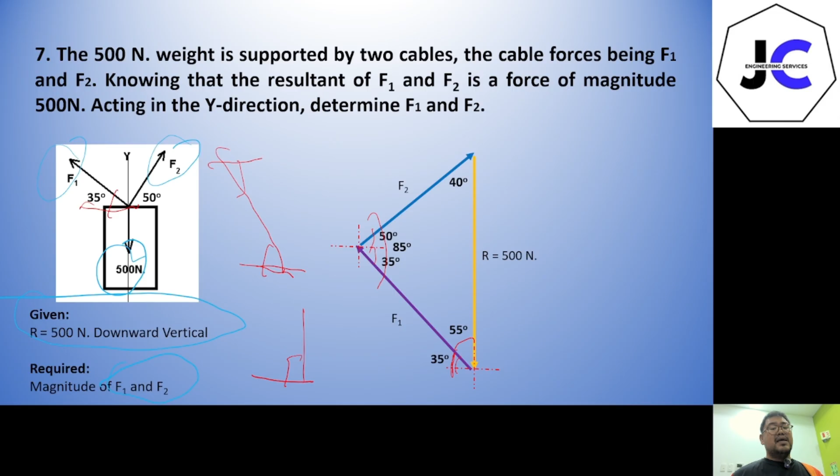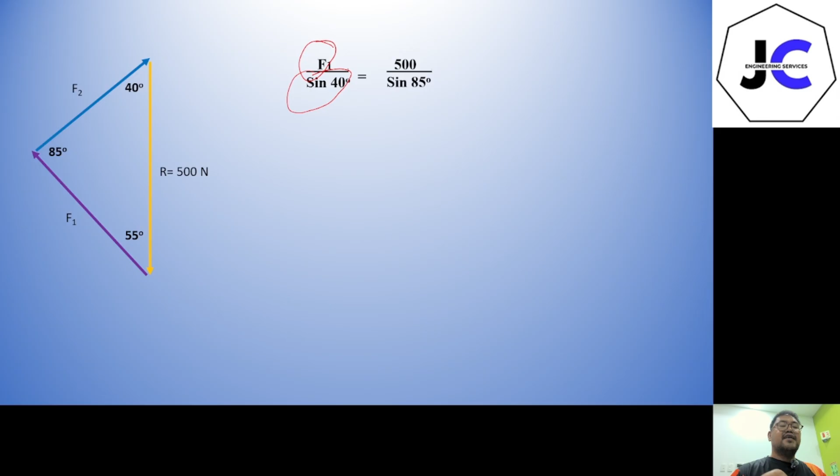Now, solving for F1 and F2, the most appropriate method is the sine law. For F1, we have F1 over sine 40. F1 opposite sine 40 is equal to 500 opposite 85. Now, cross multiplying and solving for F1, we have 322.62.

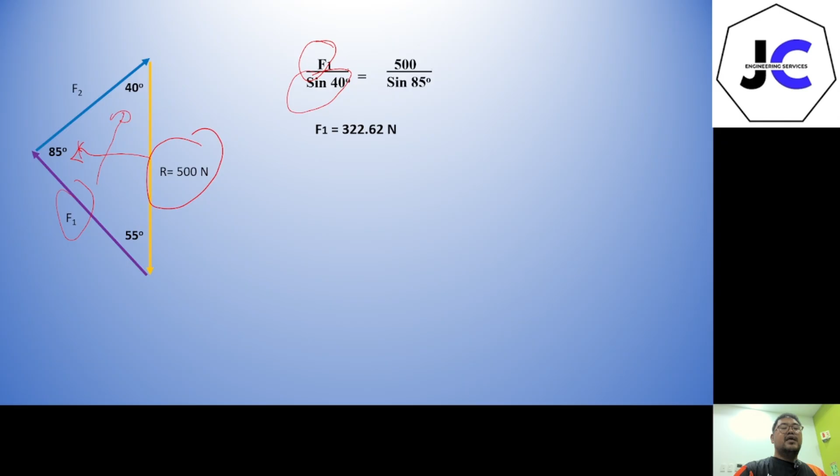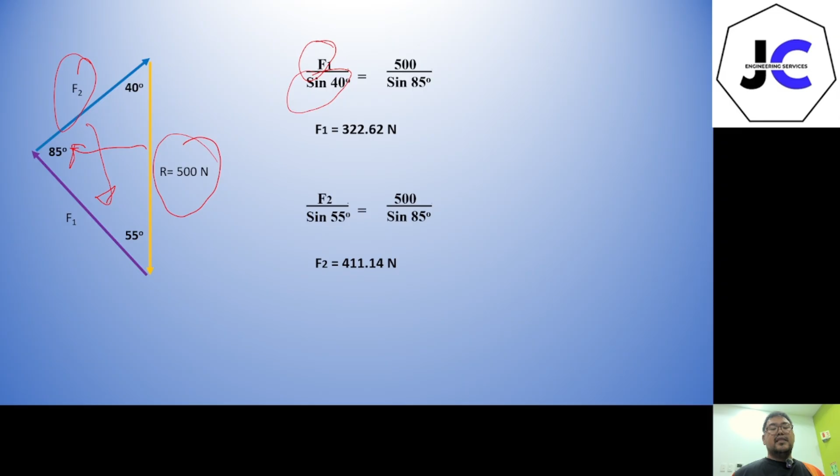Now for F2: F2's opposite angle is 55, same as 500 opposite 85. So F2 over sine 55 equals 500 over sine 85. Cross multiplying, we have F2 equals 411.14 Newton. Okay, next.

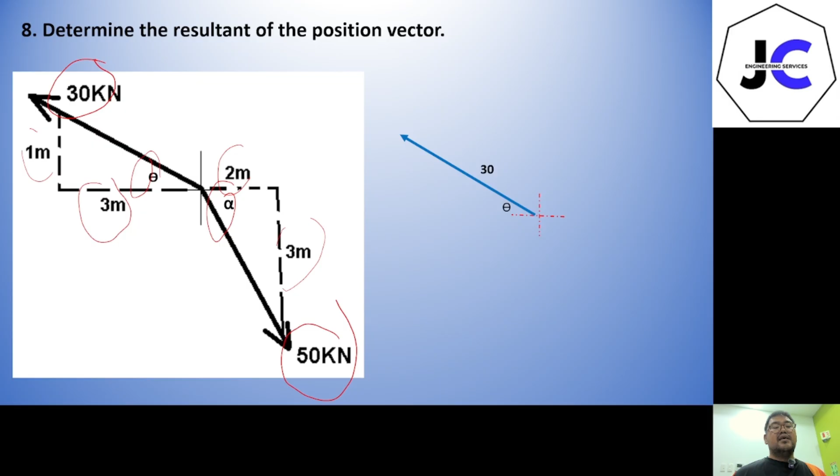Or slope, we call it slope, y over x. Okay? So we have here 30 kilonewton, the other one is 50 kilonewton. So let's draw this: 30 kilonewton, this is theta, its angle.

Then we connect the other one, on the other side. 50 kilonewton, its angle with respect to the horizontal, we call this alpha. Our theta, this theta, by opposite angle, is also theta.

But we need to solve these angles. So from the figure, for this one, theta is only: tangent theta equals 1 over 3, theta opposite over adjacent. So you have 1 over 3. Solving for theta, that is 18.43 degrees.

For alpha, same approach: tangent alpha, opposite over adjacent. So you have tangent alpha equals 3 over 2. So alpha is 56.31 degrees. Okay, now we'll label this as phi.

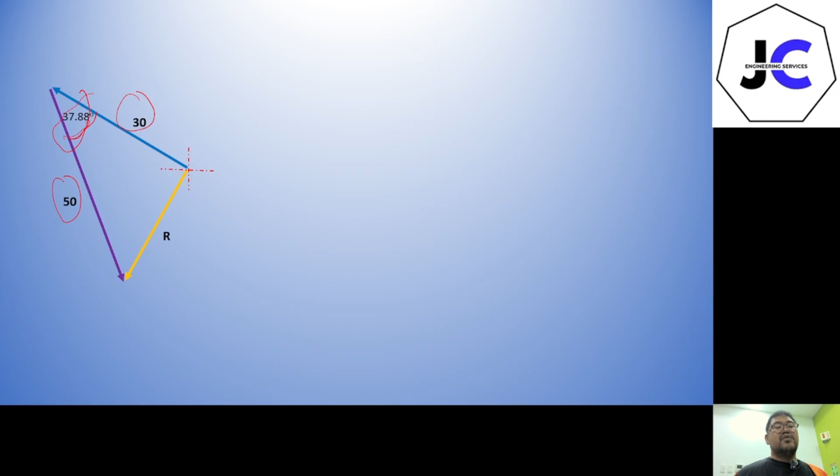Okay, so the goal is clear now - you're asked to solve for the resultant using our cosine law. Given the two components and the included angle, so using cosine law: r squared is equal to 50 squared plus 30 squared minus 2 times 50 times 30 cosine of the included angle, that is cosine 37.88.

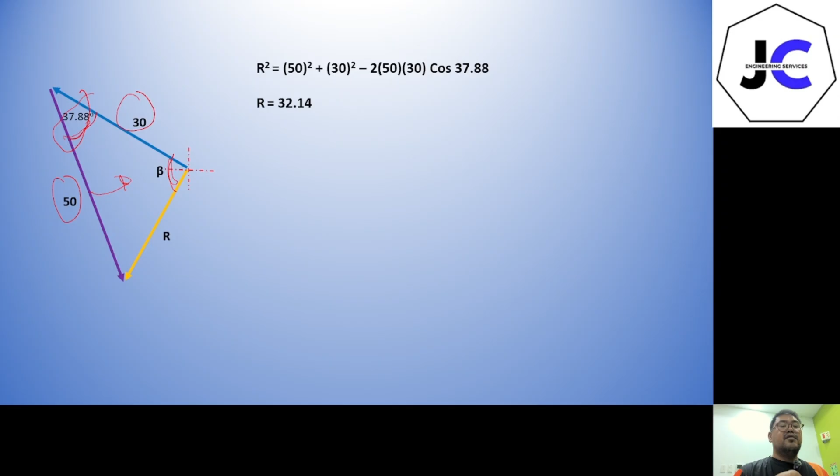Using sine law, this side over its opposite angle is equal to this side over the opposite angle.

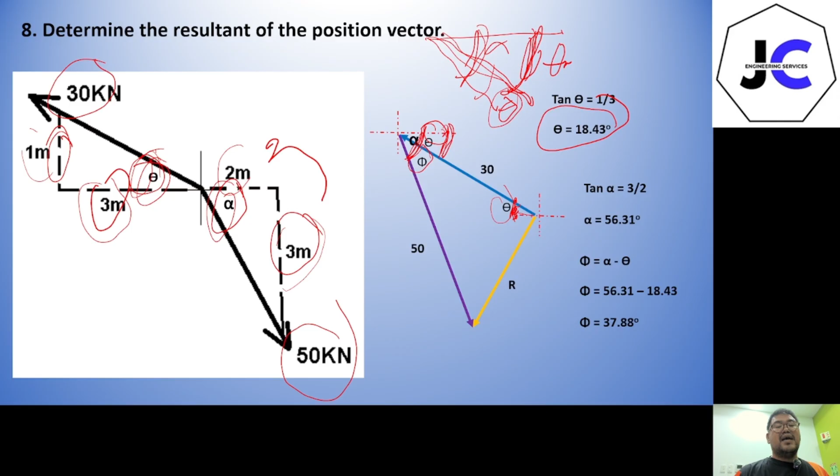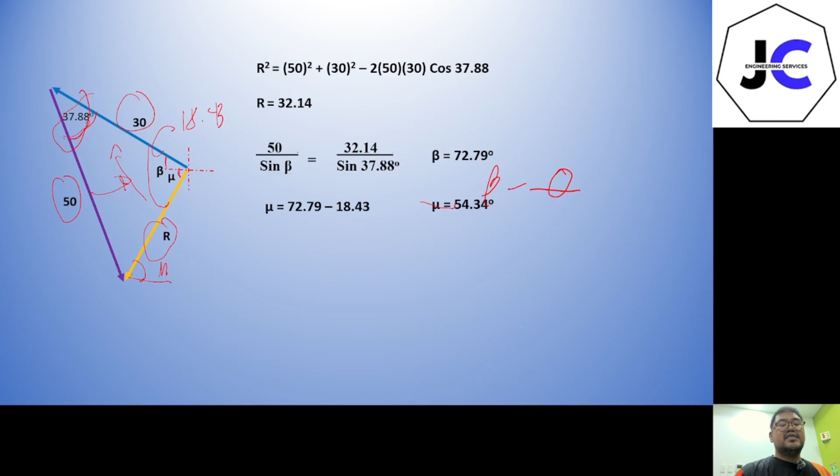So we have mu is only equal to beta minus theta. Solving for mu, that is 54.3 degrees, so this comes to 54.34 degrees.

So the resultant is equal to 32.14 kilonewton magnitude acting at 54.34 degrees with respect to the horizontal. That's the answer.

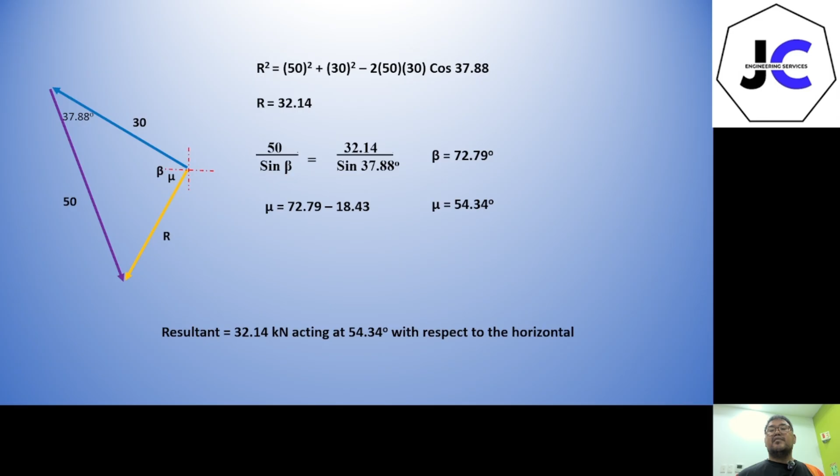Okay, next we have problem number 9. You are asked to resolve the position vector A of the car measured from fixed point O into OB and BC. The distances OB and BC are shown, not OC.

Okay, first, the 65 degrees angle shown here is the larger one. So about 65 degrees. First, you have to find this theta, which is the small angle.

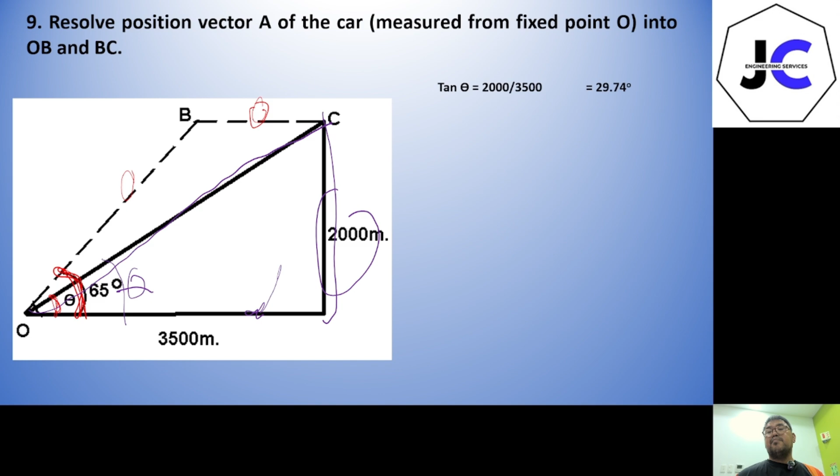Using this triangle, we can solve for theta. Tangent theta is only opposite over adjacent, so tangent theta is equal to 2,000 over 3,500. Solving for theta, that is 29.74 degrees.

So that is 29.74 degrees. Note that if this is 29.74 degrees, this other one, by opposite angle, is also 29.74 degrees.

Then, this one should be 60.26 degrees. This one is only 90 since it's a right angle - that is 90 minus 29.74 degrees. Now we need to solve for alpha.

Alpha actually is equal to 65, minus our theta of 29.74 - that's the larger angle minus the smaller 29.74. So alpha is equal to 35.26 degrees.

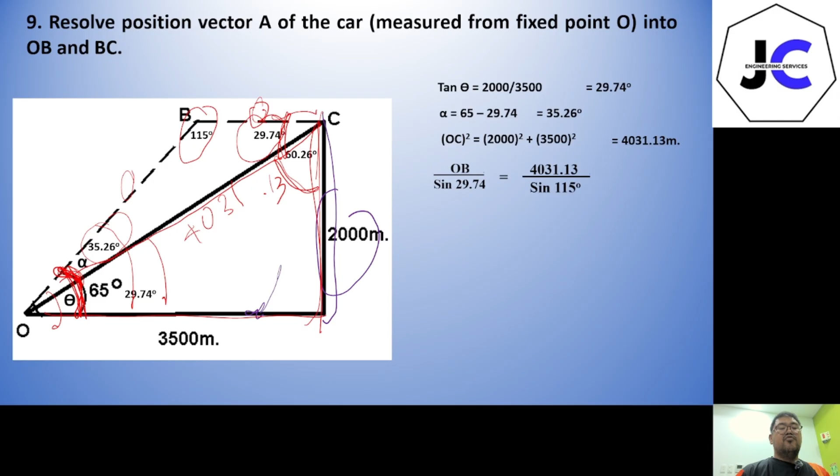Now let's solve OB and BC using sine law. For OB: this side over its opposite angle of 29.74 is equal to the other side over its opposite angle of 115. Solving for OB, that is 2,206.43 meters.

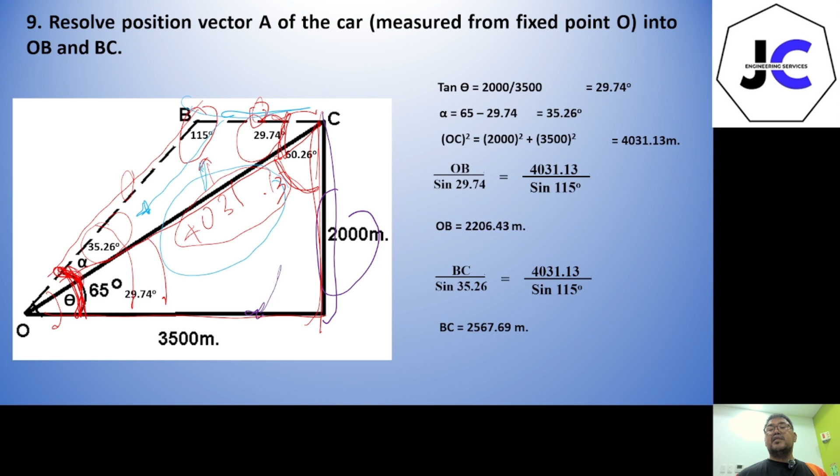For BC, using sine law the same way: BC's opposite angle is 35.26, and 4,031.13's opposite angle is 115. Solving for BC, we have 2,567.69 meters. So that's the answer.